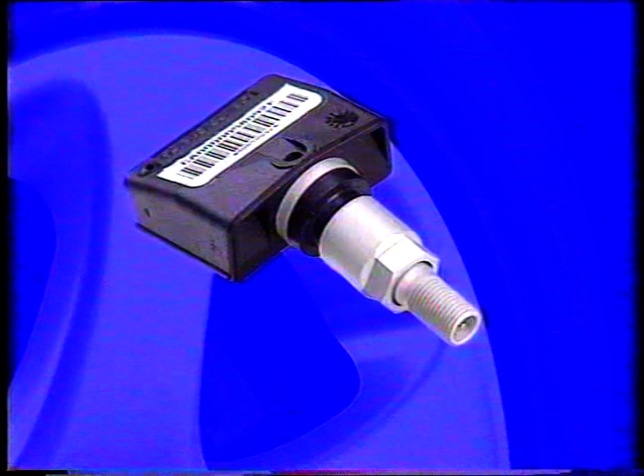This last system, fitted as standard, employs pressure sensors located inside each wheel. The pressure data are transmitted as high-frequency signals to a receiver at the rear of the vehicle. The receiver is wired to the Built-in Systems Interface, BSI, which analyzes the data and then transmits warning messages when appropriate to the instrument panel and the multifunction display via the VAN network.

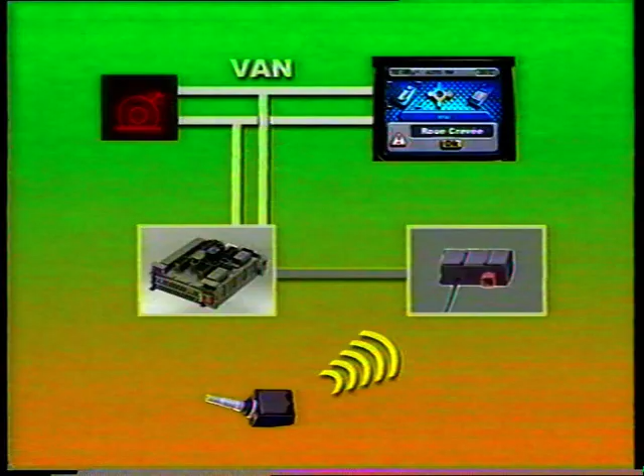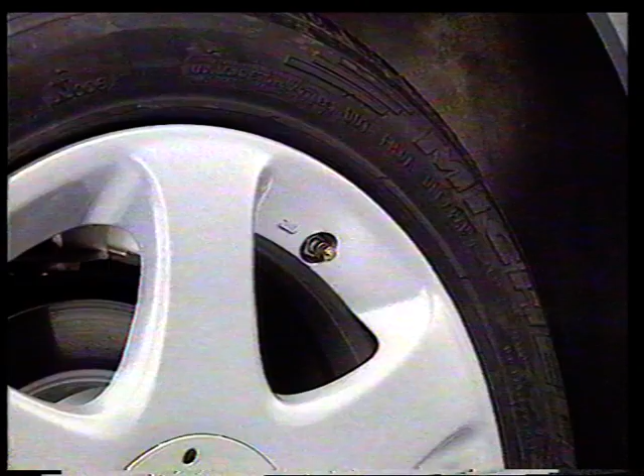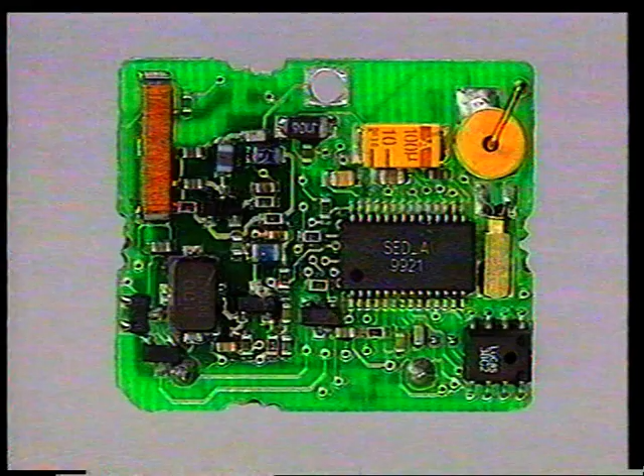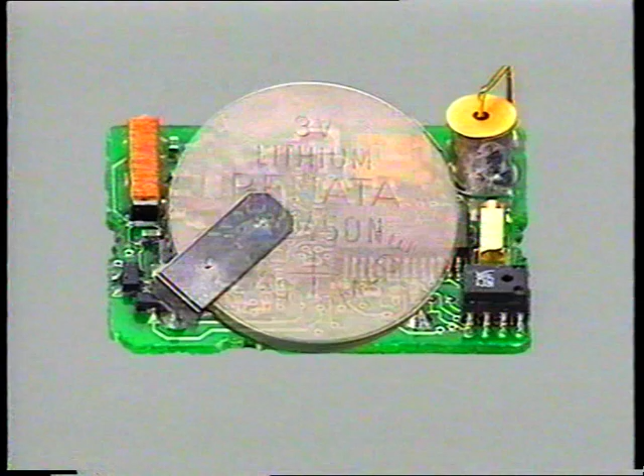All four wheels of the vehicle are fitted with transmitter modules that encompass the inflation valve, and an electronic circuit for measuring pressure. The entire electronic system is embedded in resin to enable it to withstand vibration. The system is powered by a lithium battery with a life of about 10 years, making it completely self-contained.

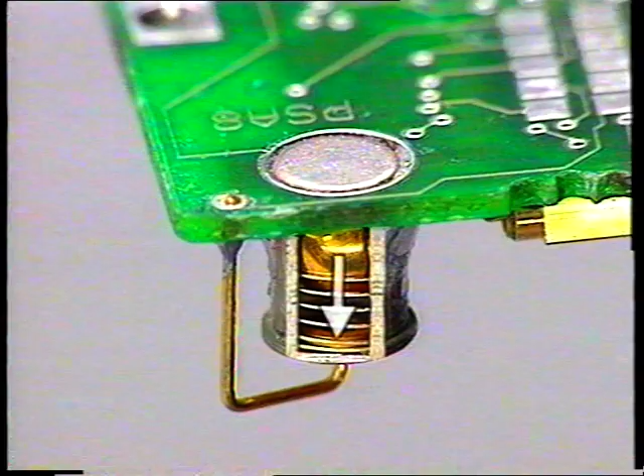As a battery-saving measure, the transmitter modules are fitted with an inertia switch, consisting of a ball and spring. The centrifugal force generated by the rotation of the wheel enables this switch to detect whether the vehicle is at rest or moving.

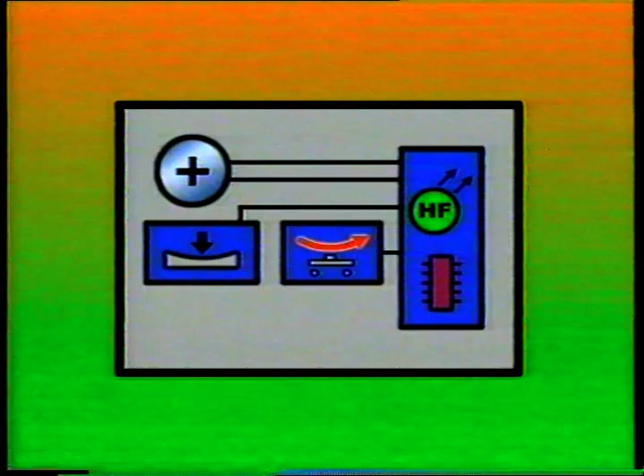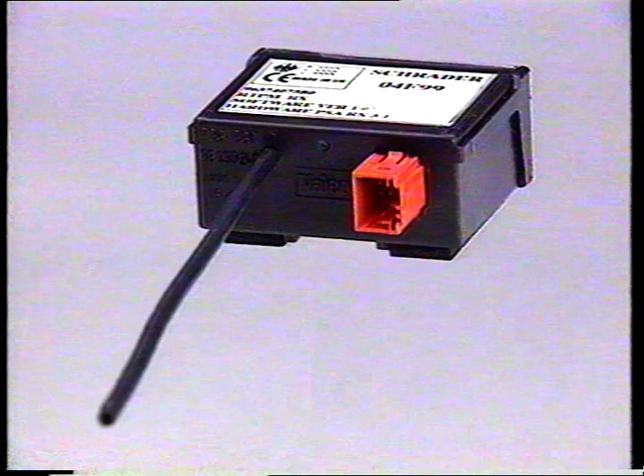The modules also contain a pressure sensor. It is of the piezo-resistive type. The modules emit a radio signal at a frequency of 433.92 MHz to an HF receiver, located under the rear parcel shelf.

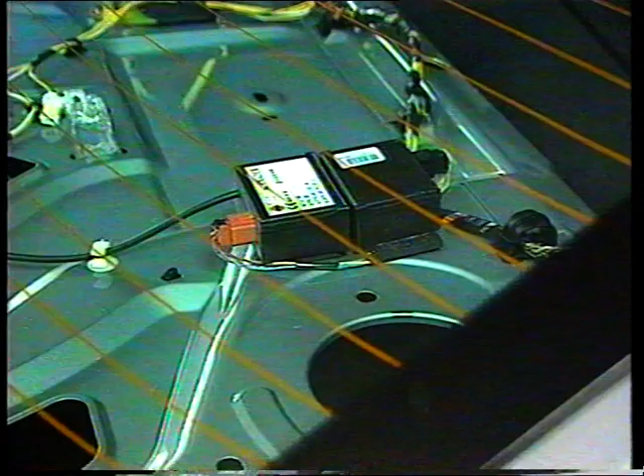The transmitted messages consist of four main parts. First, the module transmits the function code, which identifies the type of message to the BSI. For example, this may be moving off, normal running, or change in pressure.

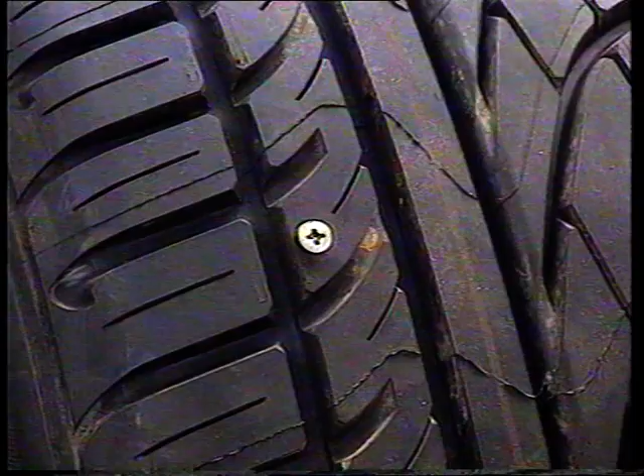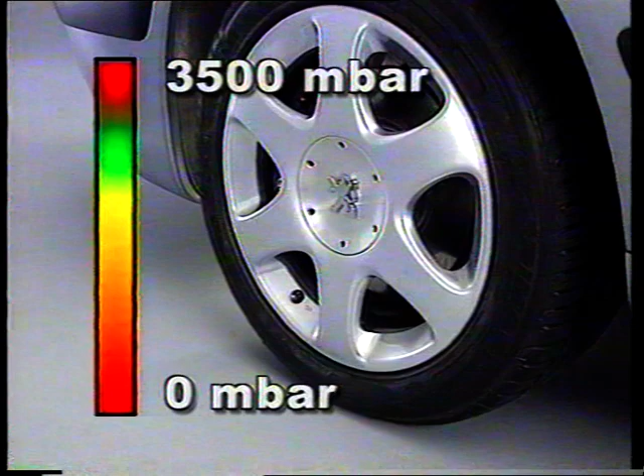The module then transmits a field containing its identification code. Next comes the pressure data field. Pressure is measured in the range 0 to 3,500 millibar with a resolution of 14 millibar. Finally, a checking field is used to verify the coherence of the frame so that any invalid messages can be rejected.

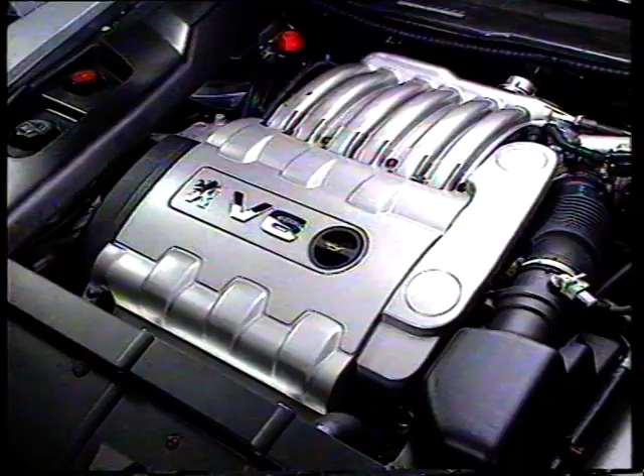The HF receiver, which is fitted with a 15 cm receiving antenna, is powered once the ignition is switched on, and it receives the engine running signal. Thus, the receiver functions only when the engine is running.

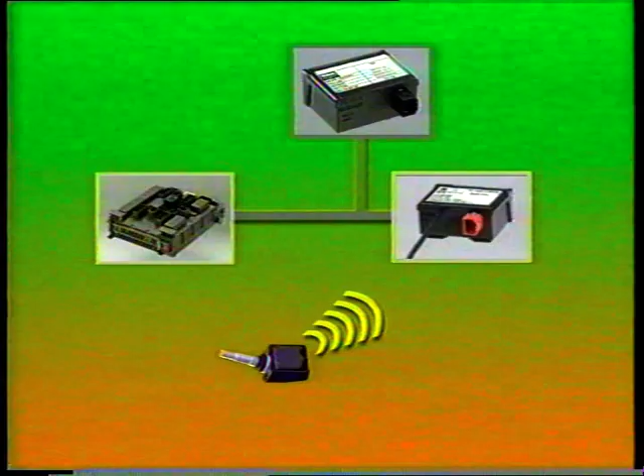The receiver is connected over an RS-232 serial link to the BSI, which analyzes the pressure signals from the 4 tires. This serial link is also used by the HF remote control unit. If necessary, the BSI transmits warning messages to the instrument panel and the multifunction display via the VAN network.

The messages can indicate that a tire is soft, or burst, or that a transmitter module is missing or faulty. It will be noted that the spare wheel is not fitted with a transmitter module.

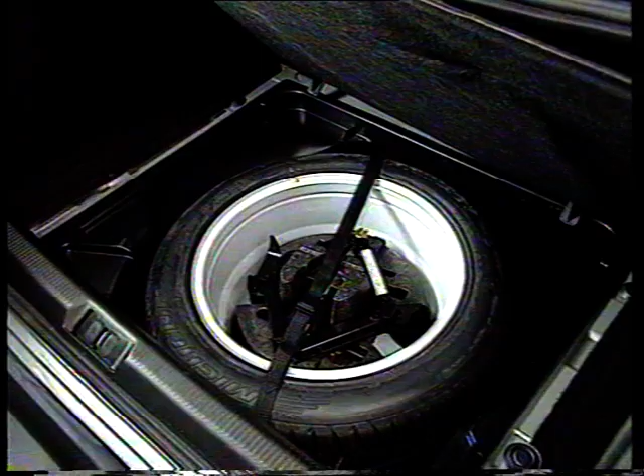When the vehicle is at rest, the tire transmitter module measures the pressure every 15 minutes and transmits the data once an hour. Once the vehicle moves off and has reached a speed of between 10 and 20 kilometers per hour, the inertia switch closes. The module measures the pressure and transmits an initialization moving off message.

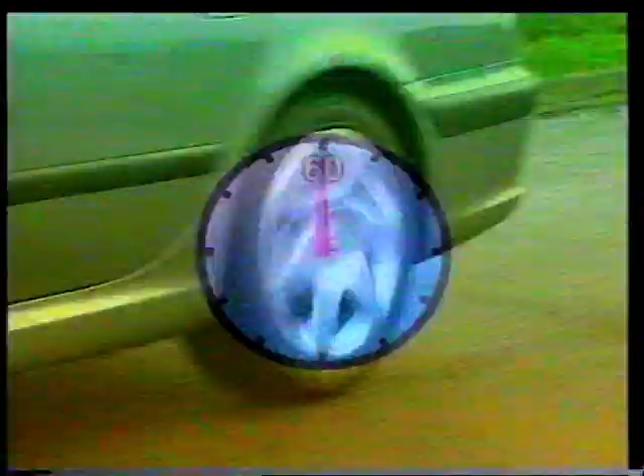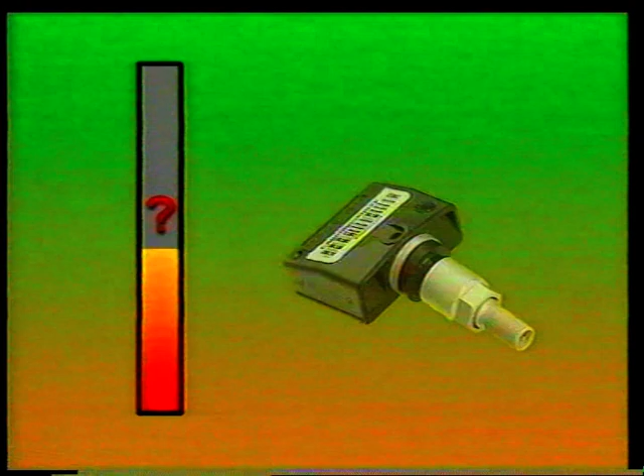While the vehicle is moving, the modules measure the tire pressures every 10 seconds and transmit the signal once a minute. If the BSI receives an abnormal pressure signal, or does not receive a message from one of the 4 modules while the vehicle is moving at 25 km per hour or more, the relevant warning is transmitted.

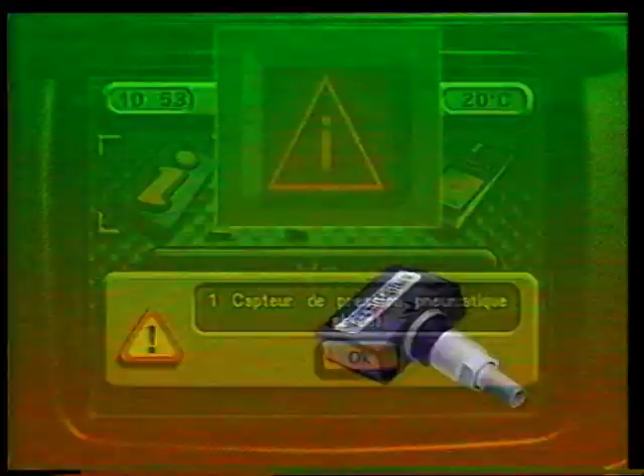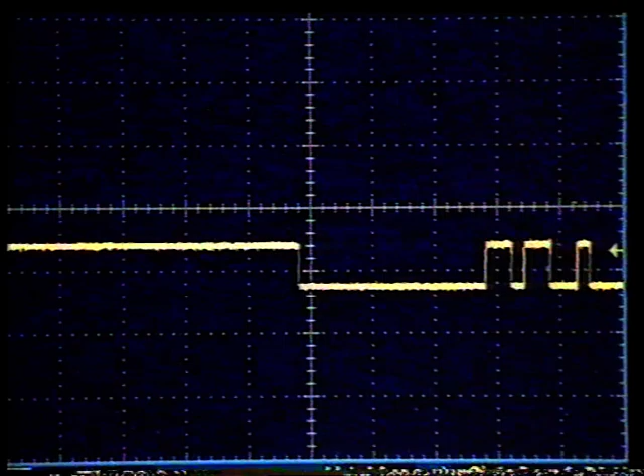If a module detects that the pressure has changed between 2 measurements by more than 84 millibar, it transmits an additional warning message. The BSI continuously analyzes the pressure signals. Pressures are regarded as satisfactory if they are no more than 390 millibar below nominal pressure.

If the difference from nominal pressure is between 390 and 530 millibar, the tire is regarded as underinflated. The warning is given by an orange pictogram accompanied by an audible signal. The message 'Tire soft' is displayed for 6 seconds.

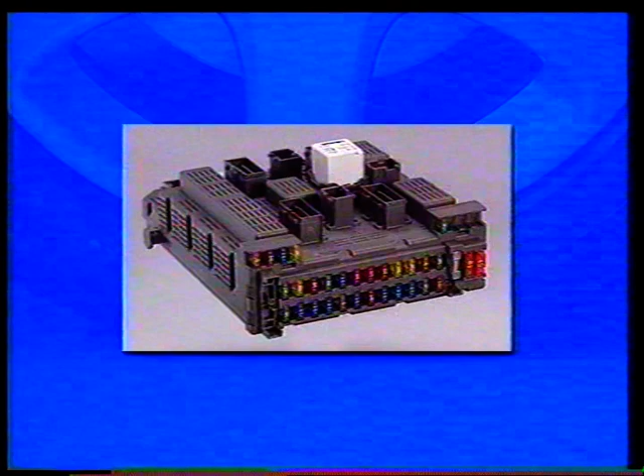If the pressure is more than 530 millibar below nominal, the tire is considered to have burst. The warning is given by 2 red pictograms, and the display is maintained until the ignition is switched off. The BSI also calculates the rate of change of pressure, and if the loss of pressure is rapid, transmits a warning message.

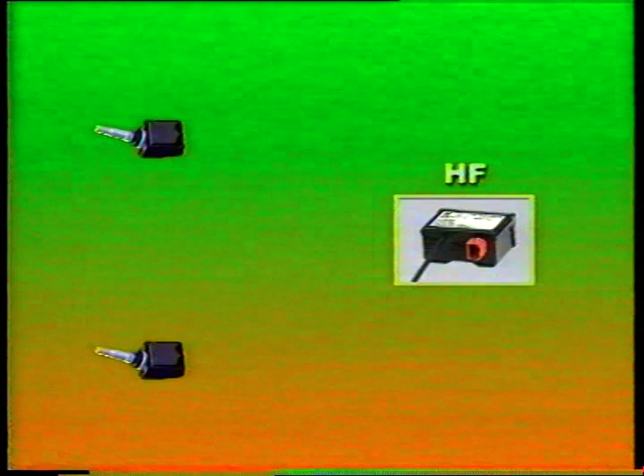If the BSI receives no message from one of the transmitter modules, it transmits the message 'Tire pressure sensor missing.' The transmitter modules are self-contained, and while the vehicle is moving, they transmit a signal once a minute. Thus, 2 transmitters may transmit simultaneously, whereupon the HF receiver will pick up a signal it cannot decode.

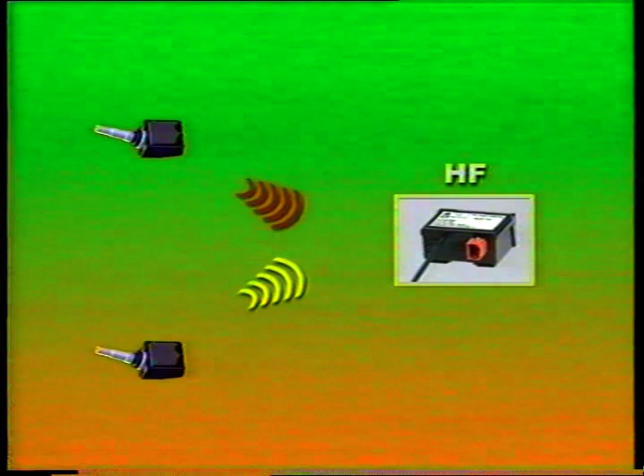To avoid the situation where 2 transmitters are in phase, a random delay of up to 4 seconds is added to the 1-minute period between 2 transmissions.

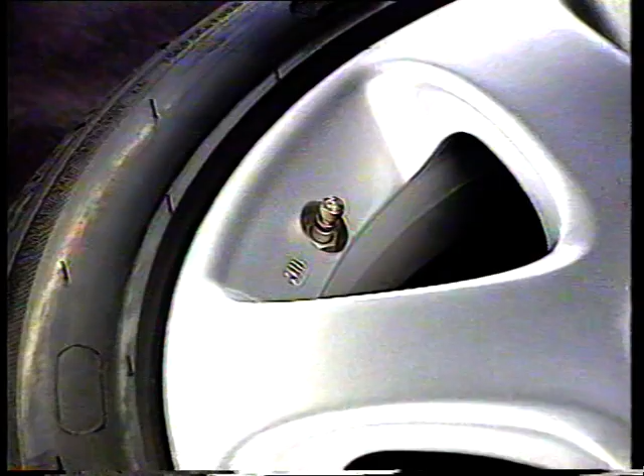It will be noted that a burst tyre placed in the vehicle boot continues to transmit in vehicle stopped mode, i.e. once an hour. The transmitter module is fitted with a battery voltage monitoring system which can detect its decline at least 3 months before the end of its life. A special message is transmitted by the module and the state of the battery is stored in the BSI memory. When the vehicle stops, the modules remain in vehicle moving mode for at least 30 seconds.

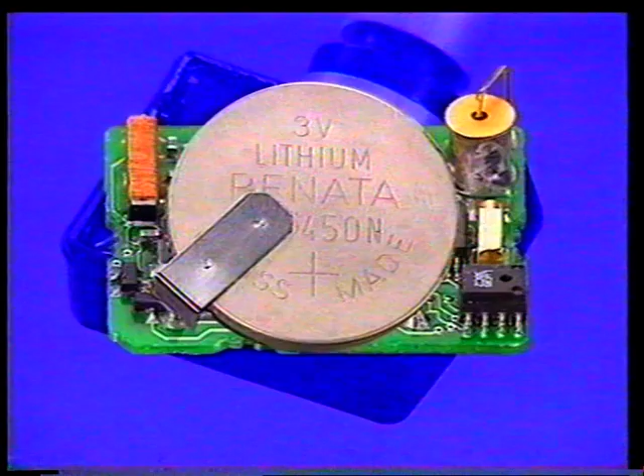Since the module electronics are embedded in resin, no repairs or maintenance to the module, such as replacing the battery, are possible. When replacing a module, check that the rubber seal is present.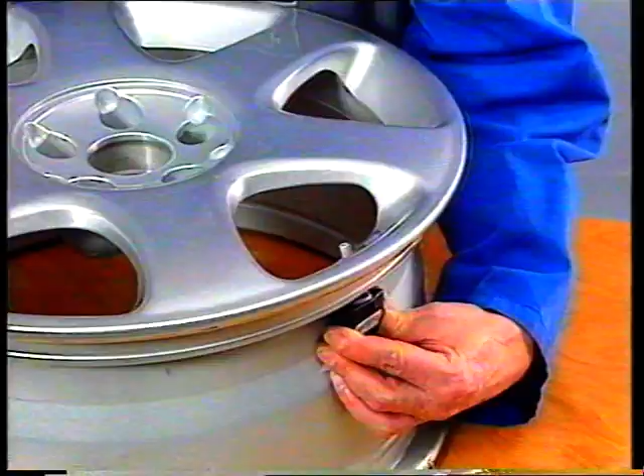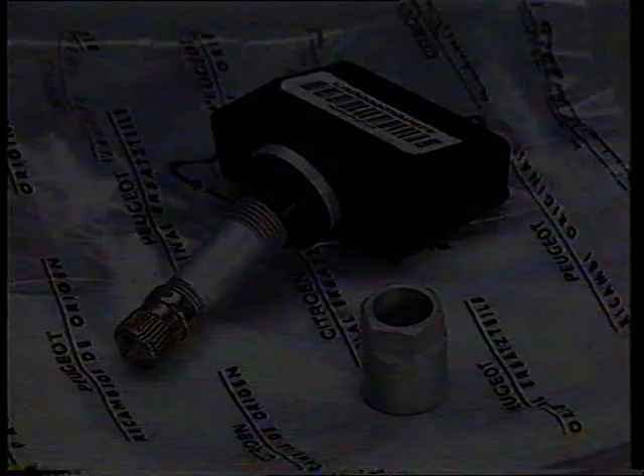Check the positioning of the transmitter module. Tighten the nut to the recommended torque. It will be noted that modules are delivered in the off mode, i.e. inactive, and that they become operational once the inertia switch closes as the vehicle moves off.

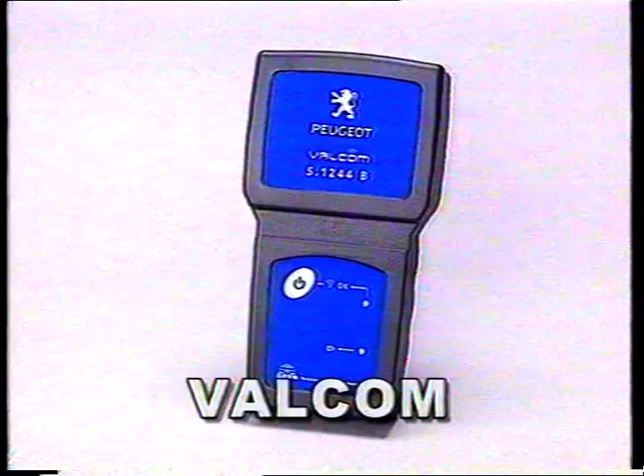After replacing the module, it is essential to communicate the identification code of the new module to the BSI. This is done by using a tool known as the Valcom or Forcer in conjunction with the Diag 2000. The Forcer transmits a signal at a frequency of 125 kHz for 7 seconds.

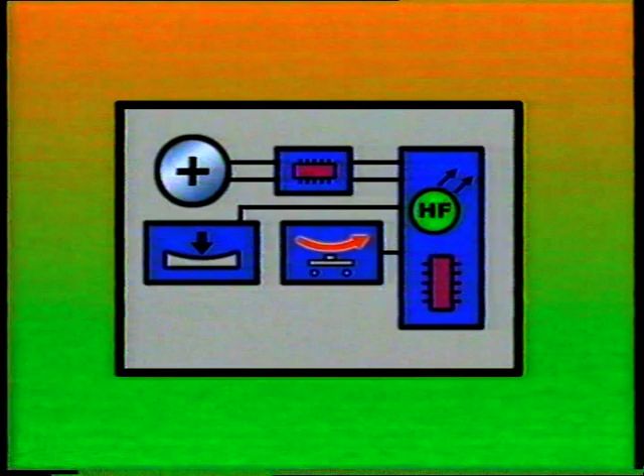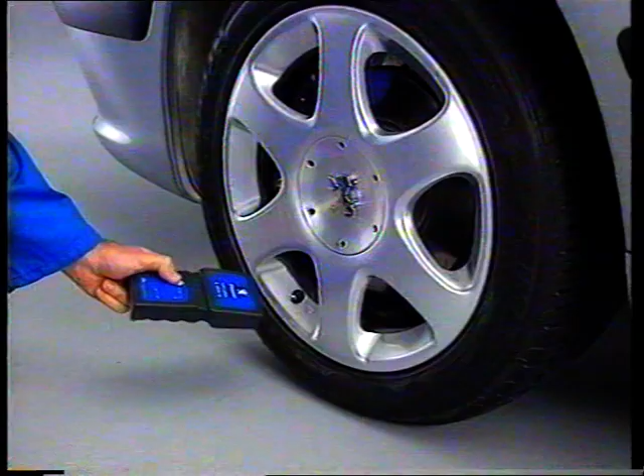The tyre transmitter module is fitted with an antenna of the transponder type. After receiving the signal for 5 seconds, the module transmits 8 successive identical frames containing the identifier. These messages are special in that the function code field contains the indication learning mode, thus enabling the Diag 2000 to teach the new code to the BSI.

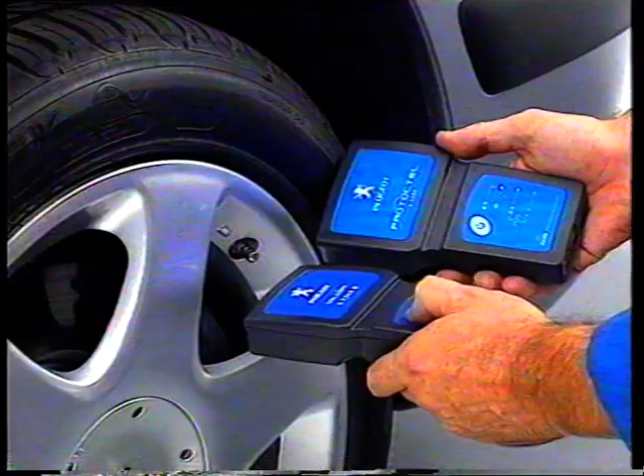The Protoctel, which is already used for checking remote control units, is used to verify the HF emission from a module. The BSI stores in its memory any module faults together with the battery flat messages. The faulty module or flat battery can be located by the Valcom, again used with the Diag 2000 using a procedure of elimination.

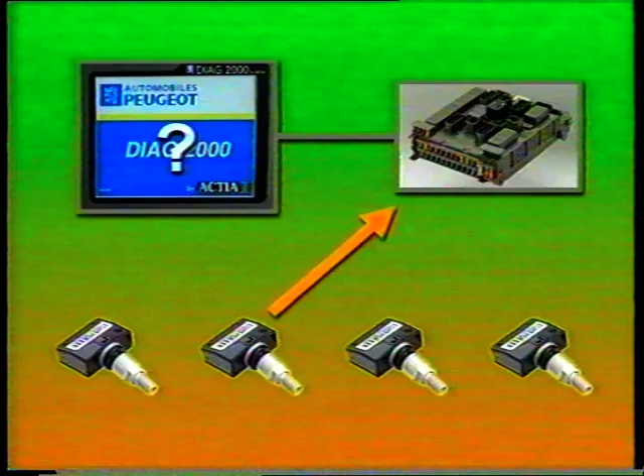It will be noted that all these operations should be conducted with the engine running, since it is only in those circumstances that the HF receiver operates. With this system for detecting underinflated tyres, Automobiles Peugeot offers a further active safety feature for the 607.